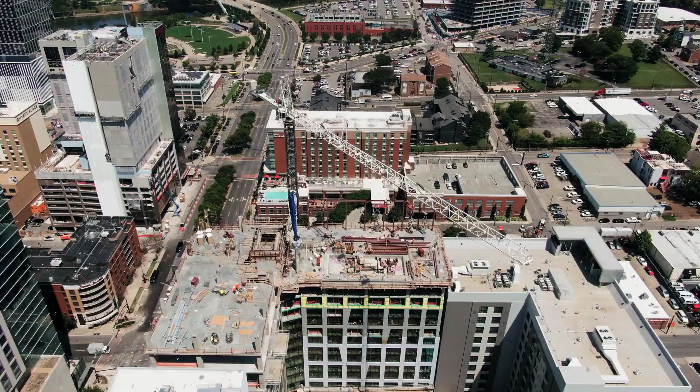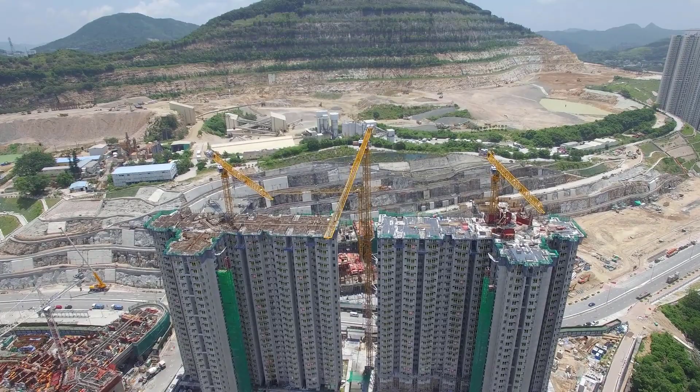The construction industry has reached the age of digitalization. What had started with the invention of the computer by the civil engineer Konrad Zuse developed into many milestones in the construction industry. One of these major changes in the planning culture of the building industry is the working method, building information modeling, BIM, where a digital model of a structure with a high depth of information is created.

Follow the work of a young team that has commissioned the design of a building of the Technical University of Munich by using the BIM approach.

This method allows them to merge several disciplines together within a unique 3D model. Above all, communication is an important part of successful BIM planning. In the case of international cooperation, this cannot always be guaranteed.

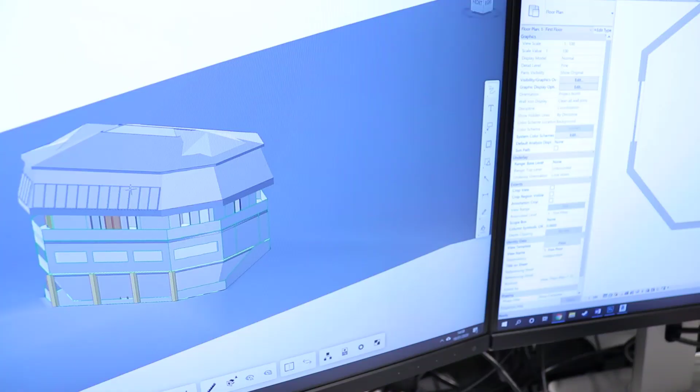In order to reduce risk, improve quality, and deliver projects on time and on budget, the team decided to use BIM 360 as a unified platform connecting project teams together.

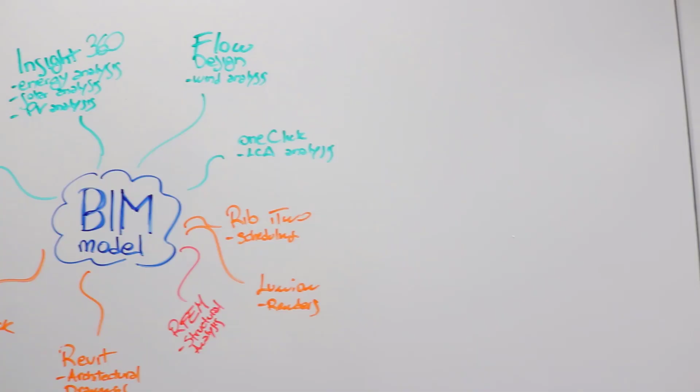From everywhere, at any time, you can work on a digital model. This makes the work under the planners more efficient.

Hi everyone, I'm Alessandro and I was in charge of the design of the rural building. Being an architect means dealing with a huge responsibility.

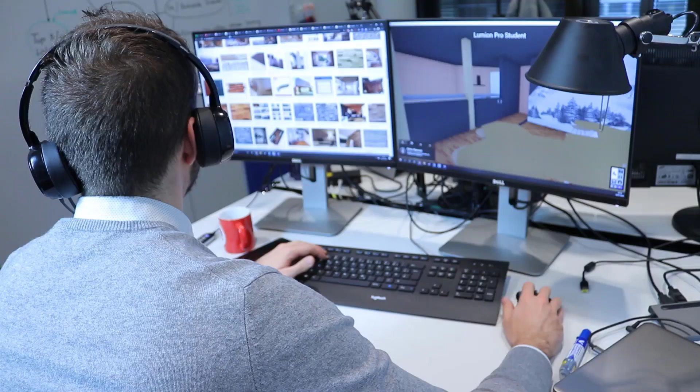When I started designing a project, I started asking myself, what does this place need? What can I do to create value?

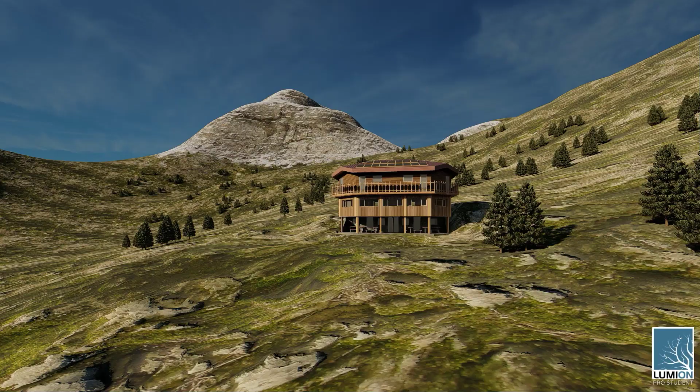The site in Wendelstein is unique. You have a 360 view, spanning from a deep valley on the south to the Wendelstein top to the north. You are completely surrounded by nature. And that's the feeling I want to give to everyone coming to our mountain office.

It doesn't matter if you are coming there for a meeting, passing by during a trekking, or just a ride for your skiing weekend. Our mountain office will provide you everything you need.

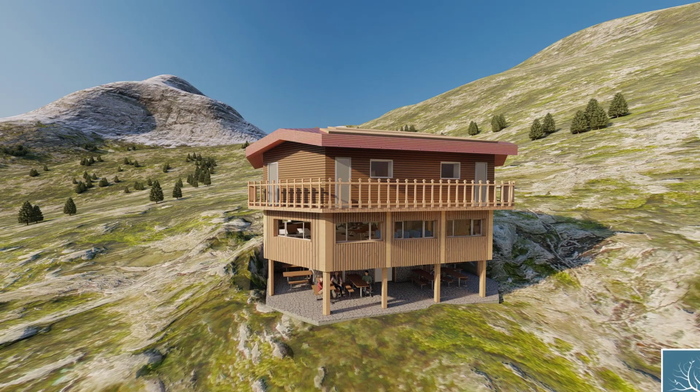The outer space of the refuge, delimited by columns, will offer shelter to trekkers, also when it is closed. As you enter, lockers and shelves will allow you to relieve yourself from your heavy equipment, boots and skis.

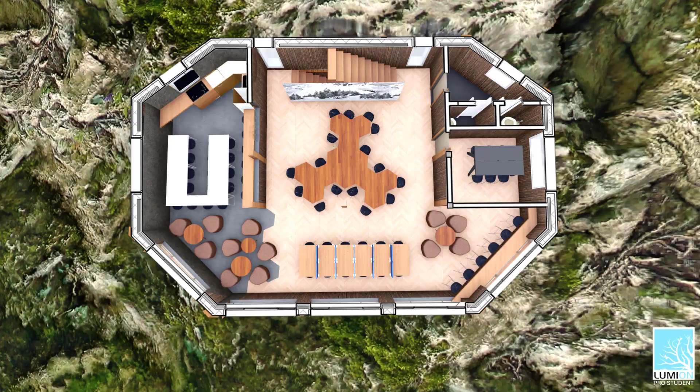The first floor is where office and refuge lifestyles merge together. The space is open, allowing people to freely move around from the kitchen to the meeting room, just like creativity flows as we move along.

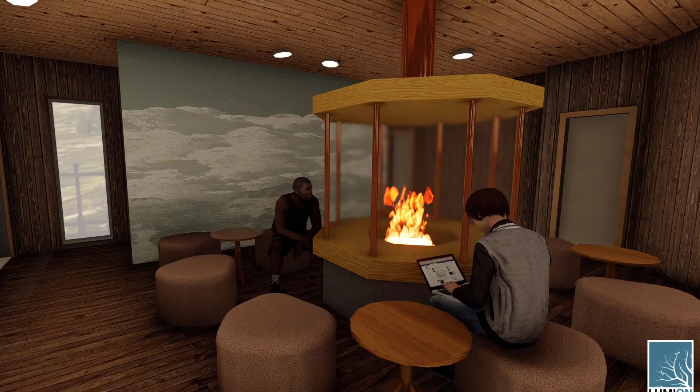On the second floor, we wanted to provide a more intimate space. The central fire pit, which also serves as a heating system, will give you that cozy atmosphere that you were looking for going outside the crowded city.

Talking about the rooms, there aren't suites, business or economy options. There are just two types of rooms, for 6 or for 8 people.

Are you in love with sunsets, or are you a morning person? And if you are brave enough to go out and stare at the night sky, the balcony will fulfill your desire. But all this thinking needs to be put into practice.

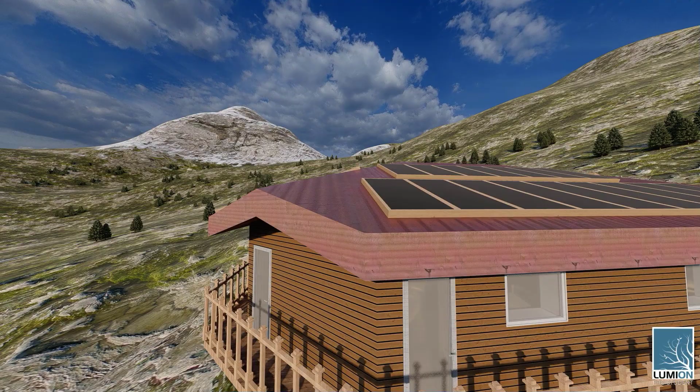That's why we also focused on construction technology. Wood resulted to be the best solution, both for structure and for cladding. Building at such an altitude means no street for transportation.

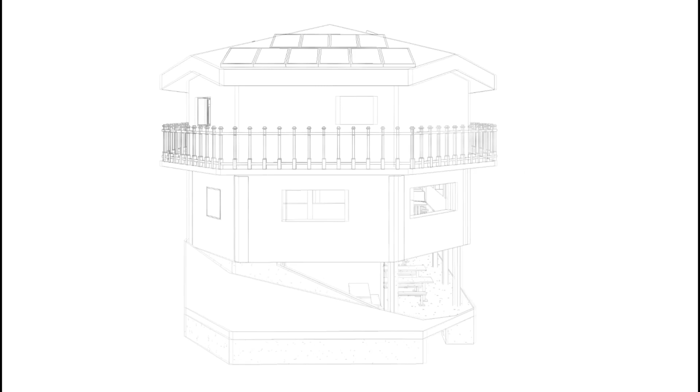We designed it with prefab cross-laminated timber structure and lightweight, small materials that have to be assembled directly on site. That ensures us to have a quick and easy mounting.

Hey, my name is Daniel, and I was responsible for the structural analysis of our building. Working with our team, and thanks to the BIM method, we created a great building.

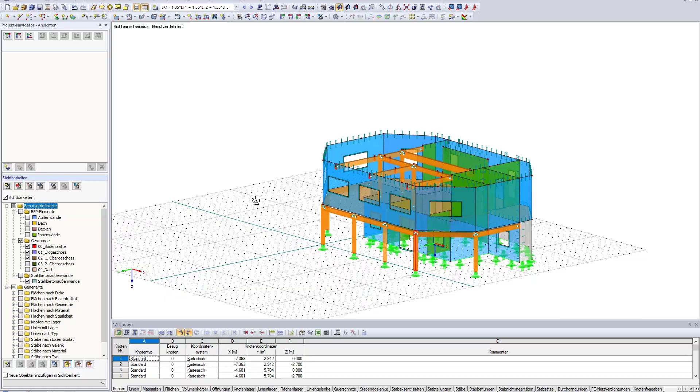For the structural analysis, we used the software RFEM by Dlubal. RFEM interacts with Revit using a direct interface. In this way, it is possible to create new models and adjust modifications in both directions.

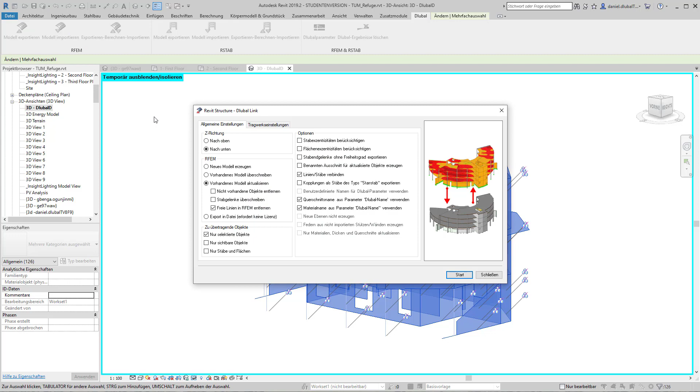Once the model in Revit is created, the analysis model can be changed easily and exported to RFEM. It was very important to mark the structural elements as part of the structure in Revit, otherwise walls, beams and slabs were missed during the export.

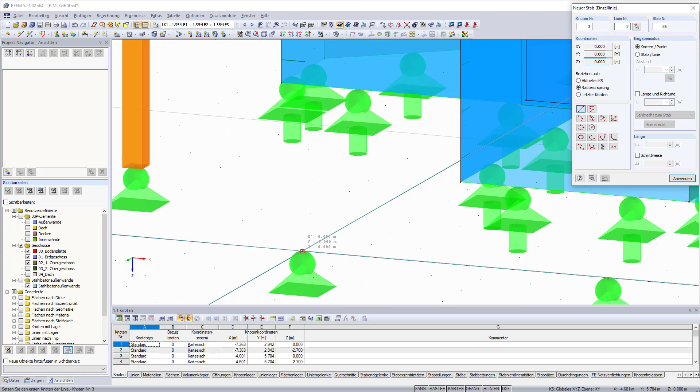First, I checked the system in RFEM concerning completeness. Is everything there, or has something been forgotten, like walls, columns, beams and so on? If yes, I added these structural elements to the model.

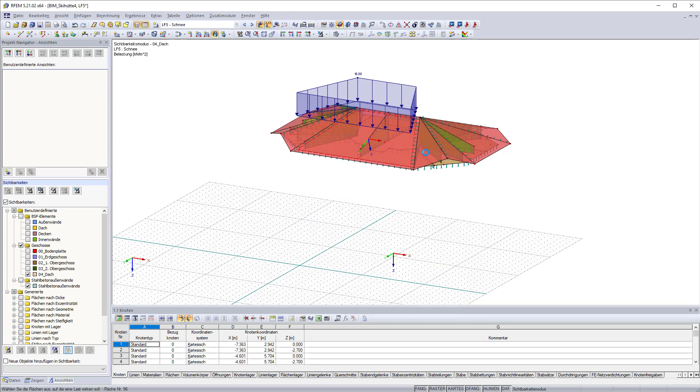Because both material libraries did not match, they had to be adjusted afterwards. Then the loads were created. In this way we have a lot of snow on the roof, so the roof had to be very stiff. We decided that we take a CLT roof which can carry the snow load.

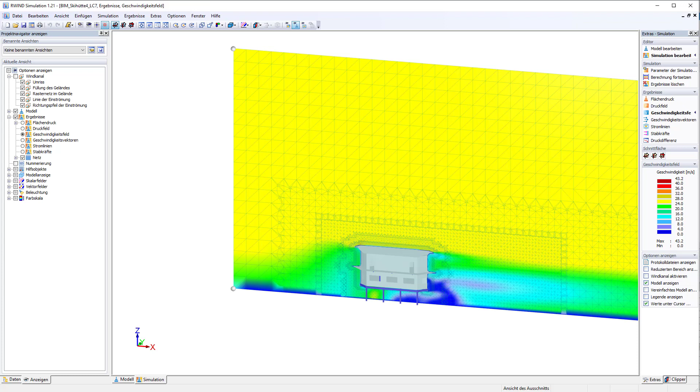With the help of the CFD software for wind simulation of Dlubal, we could also generate wind loads very easily. The software is used for numerical simulations of wind flow. It was possible to watch the different pressures as well as the velocity vectors. Moreover, we were able to transfer the wind loads back to RFEM as surface pressures.

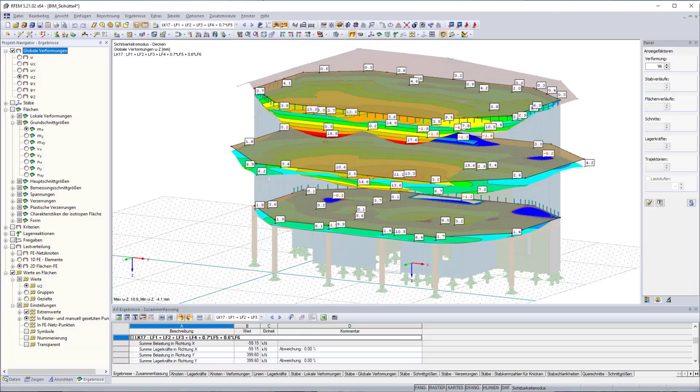After finishing the modeling and applying the loads, we calculated in order to get the results for the design of the structural elements. With a thickness of 160 mm, the CLT slabs are able to carry the living loads and also have a low deflection. The designs of columns and beams are met. They are made of glulam timber and can carry a lot of compression forces.

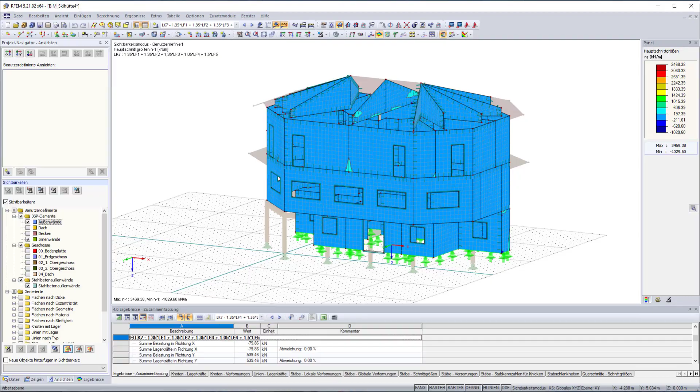Also, the walls made of CLT were designed in order to transfer the loads to the bottom. Finally, the thick roof of 220 mm had enough resistance to bending moments and also had a low deformation. Thanks to BIM, I would say that we save time, because the model is created at the same time in Revit. So the communication between the architect and structural engineer is better.

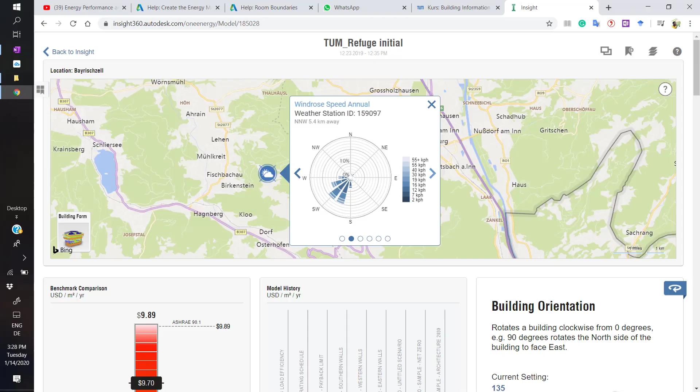Hello, my name is John, and I was responsible for the energy efficiency and sustainability of our building project. From the weather data gotten from the closest weather station to our proposed building site, I know we are building in a predominantly cold environment, and this goes a long way in affecting our building envelope and the percentage fenestration our building will have. Considering this, we constructed our building envelope on Revit using the information we got from dataholz.eu. Firstly, to ensure our material can be sourced here in Germany, and secondly, to achieve the thermal properties we want our envelope to have.

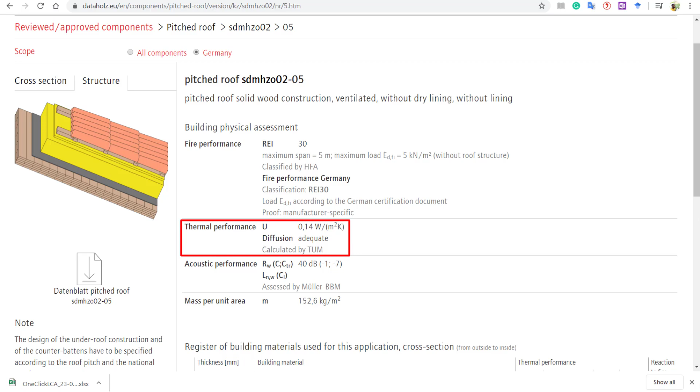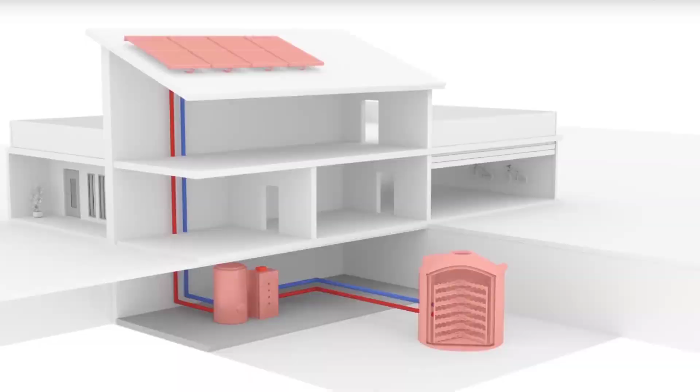Also, our building is not located in a dense urban area, so supplying district heat to this location will not be economical. That is why we resorted to the use of wood burners, and particularly a ice storage heat pump for the main source of heating our building space. And this is mainly because it requires no regulation for this installation here in Germany, and it is readily available to purchase.

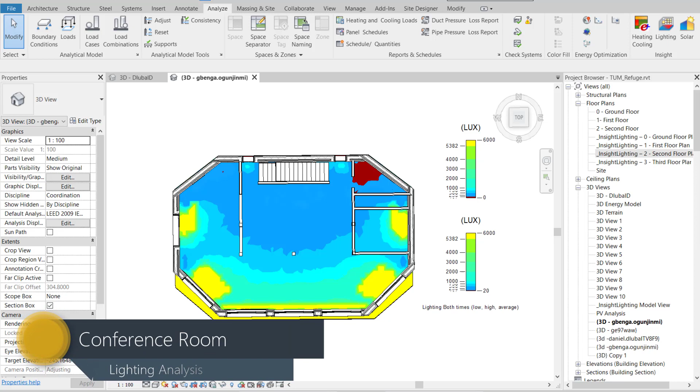For the fenestration, we tried to achieve adequate daylighting in the spaces that need it the most, and also created a good connection for the people with the external environment. This was mainly on the southern side of our building, which had little effect on our energy performance. After running the life cycle analysis, we tried to make the building more environmentally friendly by replacing materials that have the most adverse effects with more sustainable ones wherever it was possible.

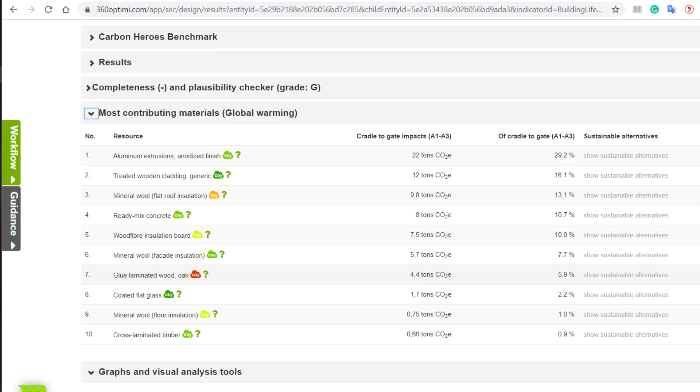One of the biggest challenges in the construction industry is the coordination of all disciplines. Thanks to the Solibri model checker, the team was able to communicate in a better and clearer way. In that way, it was easier to find problems by clash detection and to solve these issues.

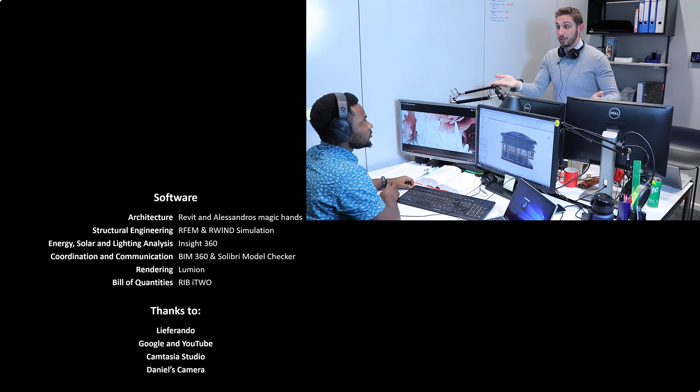John. Hey, John. Hey, can you please synchronize your model? I just did. Yeah, but you have the ownership, so please synchronize it. Yeah, every time. Come on. One of the main challenges we faced in our BIM project was the fact that I have to wake up in the morning and call Daniel. Hello, Daniel, synchronize your model, please. Come on. That's one of our challenges in our project.